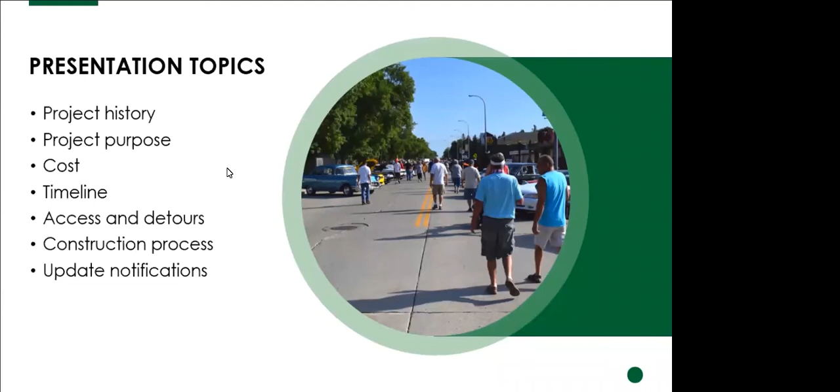And of course, at any time, please interrupt me if you have a question, or any of us as well.

So the history of the project: we really got going on this as part of our downtown efforts to revitalize some of the area. There was a lot of push from past commissions and the public to have our cultural core in our community be a place where we felt proud of a downtown that had businesses thriving, that had people wanting to come down there.

So we got to work on a lot of different projects. We had a downtown framework study that was done. We did some new zoning districts downtown. But as we kept looking at development projects, we heard from developers and engineers that one of the big issues was the street.

And so as we looked at the street, there was a lot of things that were good about it. It was moving traffic and all these things that you like for a commuter road, but it wasn't so good for downtown development. So we got to work on designing a potential project for that.

We worked with KLJ Engineering on a corridor study. They looked at traffic impacts, stopping, parking, all these sorts of different things that we typically would do on a larger scale project before we would get it done, and we let it sit for a little bit.

And then the governor came out with a new grant program, the urban grant program that was aimed at getting more development in core areas of town. It was part of the Main Street Initiative. We put together a grant application and applied for that, and we were the first awardee of that grant, and it really pushed us into actually getting this project done.

As we kept looking at it, it became apparent, after we did a core infrastructure study, that we would need to update the infrastructure in there, and that has added a little bit of scope to the project -- maybe a lot of scope to the project. But that's part of the process of starting to design a project; you find out there's more to it sometimes than meets the eye. So that's kind of where we are today and how we got to where we're going.

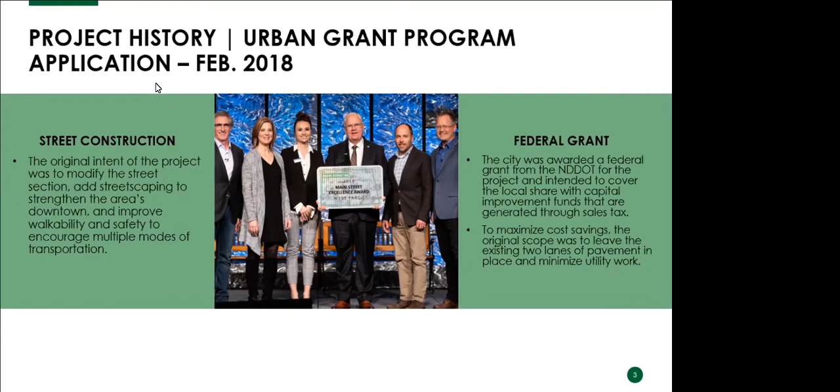Again, on the project history, we've been doing feedback for a long time, but most recently, the last input meeting was January 2019. We did have some more input meetings through the COVID times that were a little bit more difficult to handle. At that time, the estimated project cost was $3.6 million, and it's kind of gone up since then. So I'm going to let Dustin go into a little bit more of the project history and some of those meetings and where we got to where we are today.

Thank you, Tim. Hi, everyone. My name is Dustin Scott. I am the City Engineer. I will pick up where Tim left off and touch on the project history.

The public meeting we had back in September of '19 was our second public open house type meeting. We went through project details and project scope at that time.

As the project was in its early stages, we were really focused on the surface enhancements, transitioning the street into more of what you see out there with the Pioneer Place and Sheyenne Plaza developments that have occurred, where it accommodates the downtown redevelopment activities that have been going on.

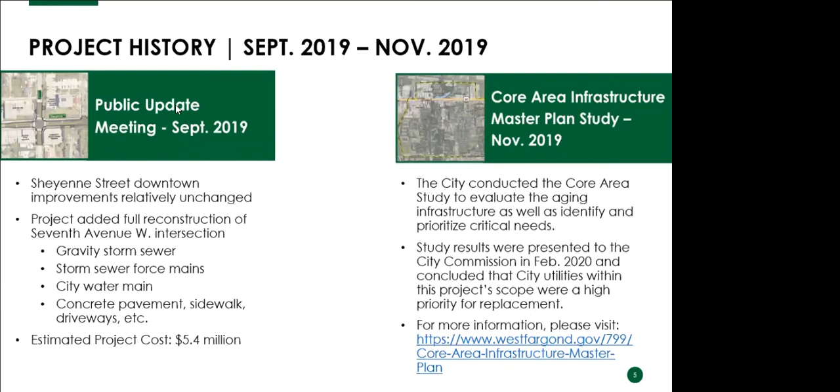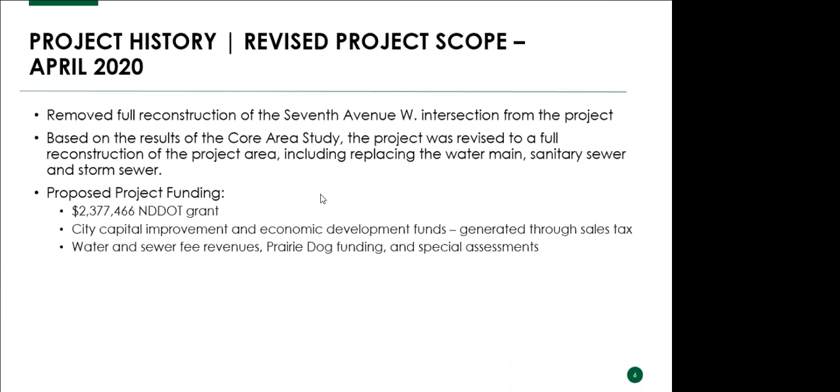Fast forward to April of last year. Unfortunately, during the pandemic, we had to conduct a virtual meeting, but that is where we shared with the public the intent to move forward with a full reconstruction project, basically just from the north side of the 7th Avenue intersection all the way up to Main. We did have the $2.3 million of federal grant from the DOT that we are still able to use, but the project cost significantly increased, as we'll get into in a couple slides here with our finance director.

So here are just some bullet points of prior public engagement. We had our meeting in April of 2020. Soon after, we then started taking the project to the City Commission for formal actions, where the district was created in June. An engineer's report was reviewed in June as well, and amended or updated in August of 2020.

At that point, our final plans and specifications were sent to the DOT, where they advertised the construction bids and opened up the bid letting in the middle of November. First meeting in December of last year is where the City Commission reviewed the results of those bids and awarded a contract to Dakota Underground.

We did have another meeting in the middle of December with our Special Assessment Commission to start reviewing options on how we could look at allocating the assessments over this district. This is a unique, complicated project, so we felt that bringing the Special Assessment Commissioners in early, which typically we engage them once the project is done, was beneficial. In this case, we wanted to get their thoughts early on. They didn't make any formal actions, but we were able to put their comments into what we consider now our pending assessments for this project.

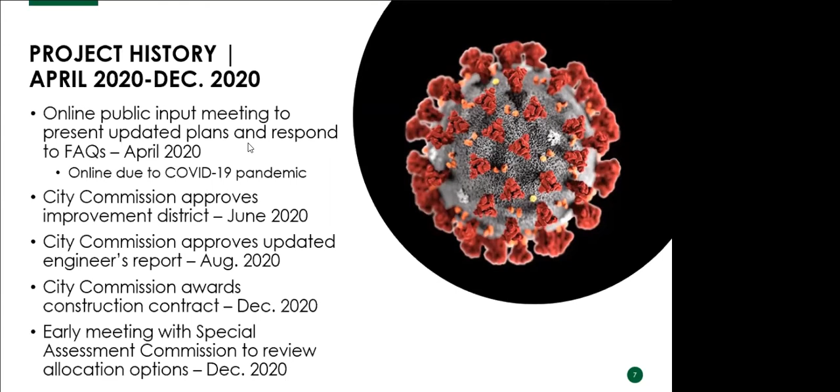The pending assessments have been published online and are available if you go to the city's tax information website. So with that, I'm going to turn it back over to Tim on the purpose of the project.

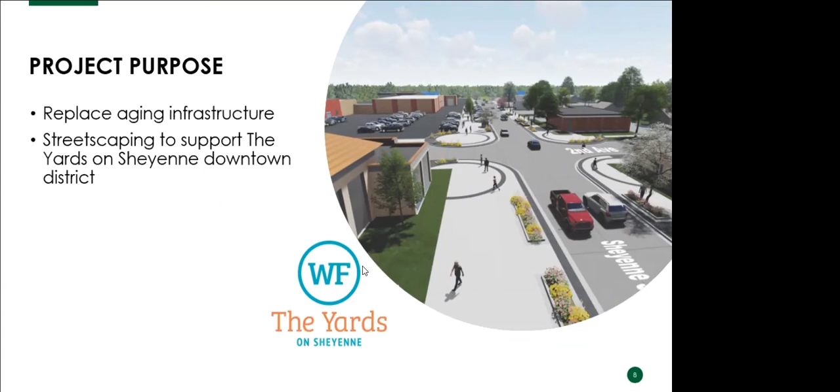Again, two very specific project purposes now. We went from one, which was really the streetscaping and aesthetic appeal of downtown, to supporting our downtown economic impacts, to now adding this replacing aging infrastructure. In our opinion, and what we've presented to the Commission, the infrastructure is aging, it has problems. We have a study that proved that to us. So our biggest concern was that we do this project and then have to come back in a few years, rip it up again, and go through updating the aging infrastructure. So it became a two-pronged purpose for this project.

Progress of downtown, I think it's becoming pretty clear that there is investment interest. What I look at this project as being is potentially a catalyst for more incremental growth. We've had a couple of really big projects and now a third. I believe that other smaller investors, when they see a road finished to this magnitude, they're going to have a lot more confidence in developing downtown. We've had these great projects, Sheyenne Plaza, Pioneer Place, really changed how that area looked. Adding this parking is going to provide a lot better atmosphere down there and less parking issues, having on-street parking available. We do have a lot of work to do, and certainly it's nice to see some investment to push toward that.

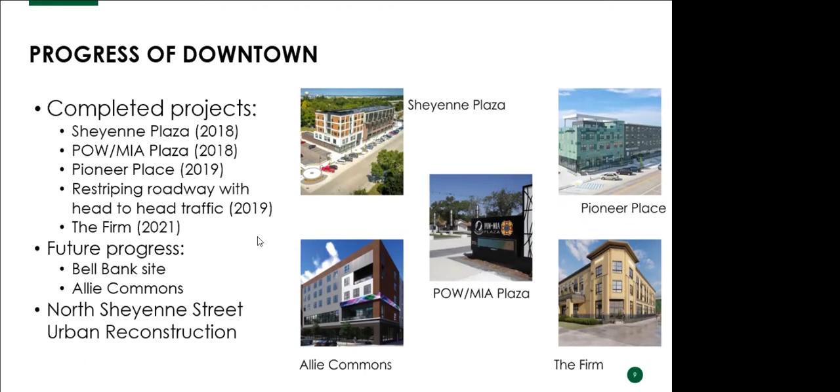With that, I'm going to turn it back over to Dustin again.

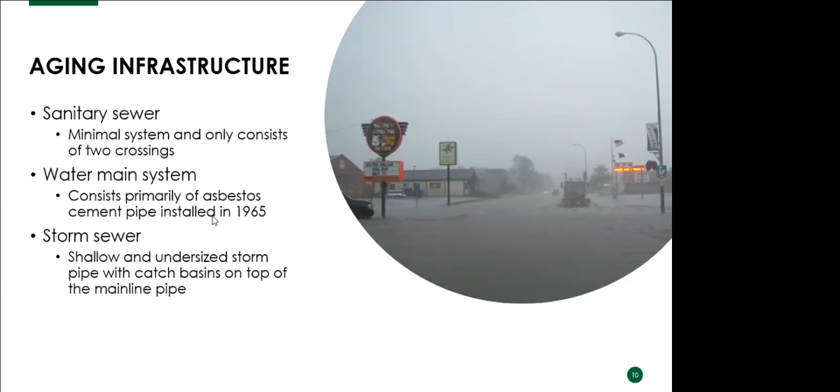These next two slides, it's difficult to see all the detail, but we wanted to provide an updated exhibit of what this project is doing. This slide shows where we are replacing the underground utilities. Blue is the water main, orange is storm sewer, and green is sanitary sewer.

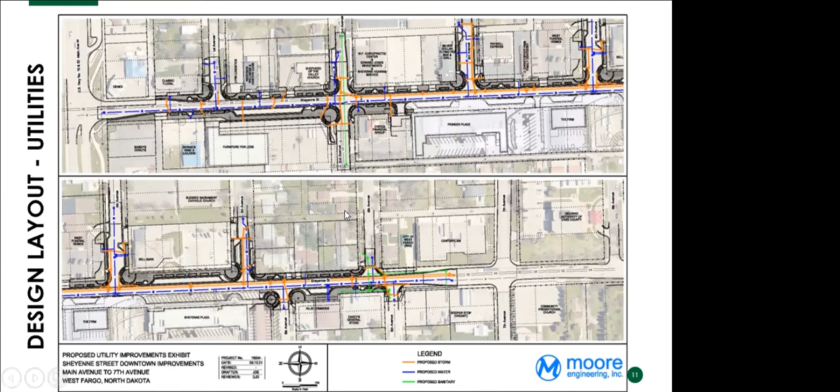This next slide is basically our layout of what the street is going to look like when we're all done. The dark shaded areas are where we're making these improvements. So you can see we're not just focused on Sheyenne Street itself—there is some work being done on the side streets up and down the corridor here.

This information is going to be available online, and if somebody wants copies, they can contact the engineering department. We will certainly work within your needs to get you this information.

So with that, I'm going to transition over to our Economic Development Director, Lauren Orchard.

Thank you, Dustin. As both Dustin and Tim have mentioned, a huge portion of this project from the beginning was meant to help enhance our downtown, now known as the Yards, for our businesses, but also for our residents, to provide new amenities to that area.

We really do believe the things we add to this streetscape are important for business development as we go forward. Just seeing the picture Dustin shared, we've had businesses down there since these big new investments occurred that were really suffering from the current infrastructure. We've been in constant communication with those businesses about what this streetscape is going to look like and the benefits that will be seen underground as well.

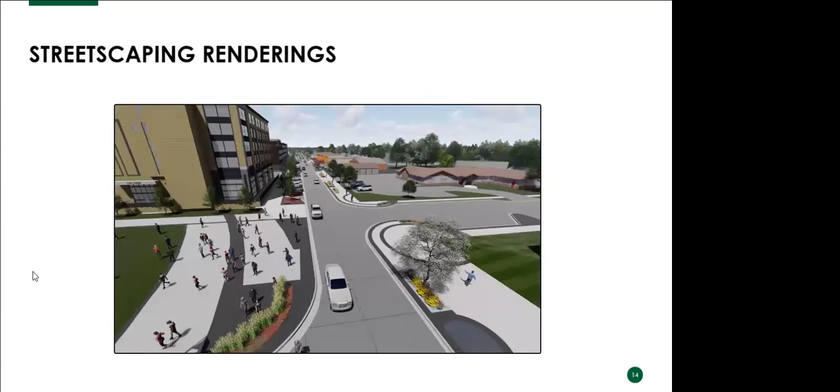You'll see throughout this video these bump out locations, where we're going to see hopefully some future public art and permanent art fixtures, gaining advice from our local businesses on what that should look like. We'll also see some street furniture to help increase the amenities in our downtown.

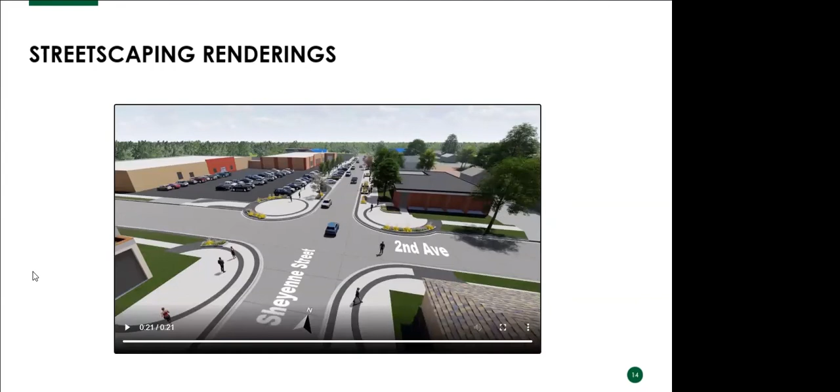Here are some other things to note that we'll be adding to truly make this feel like a downtown and make it a significant location in West Fargo. As I said, all these amenities we bring are not only for our businesses or for the foot traffic that feeds those businesses—they're for our residents, for enjoying the public spaces we've created, really helping people feel like they're at home in West Fargo.

With that, I'll turn it over to Jim.

Thank you, Lauren. My name is Jim Larson. I'm Finance Director for the City of West Fargo. I'd like to talk about the funding of this project.

As Dustin already pointed out, this project has continued to evolve as additional research and analysis has been completed. It started at $3.6 million, and it's at $10.45 million today. But there's basis for that change in scope and the improvements that will be made. Some of it is related to adding things like water and sewer, adding the economic development components, and also there's price creeps that happen as you bid. That's what these numbers address.

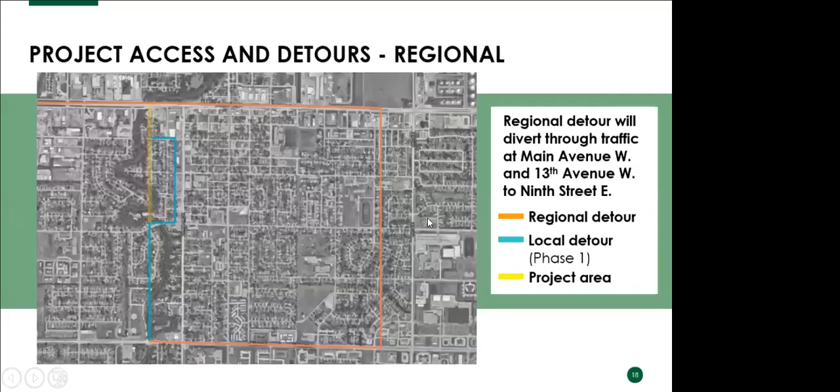So the question is about the timeline for phase 2. On this slide, it's showing mid-July to mid-September, and I believe the previous slide showed the same thing. But the text here says the phase is expected to last through the end of August. We know we're going to get into September, we know we're probably going to be working through the end of August. It's possible we could end the first part of September, but as far as the content we have available right now, I believe the project contract is set up through mid-September.

Okay, I just wanted to make sure I understood. And then my second question, forgive me if this has already been discussed and I missed it, but what are the plans for 2021 cruise nights then, with the construction, and where are we at with those?

I will defer that question. The question that was just asked is, what is the plan for the 2021 cruise night events that we usually have downtown? So my understanding for 2021 Cruise Night is that it will be hosted at the Lights, and that is being run by West Fargo Events, and Toppers was heavily involved in that as well. If you have more questions about the details, I can get you that behind the scenes - I just don't want to get it wrong up here.

Well, is it planned to return after this construction? Because I think a lot of residents have questions about cruise night. The answer is yes, absolutely, and in our design we were also very conscious of what cruise night would look like after the road diet is done, so it's in the design.

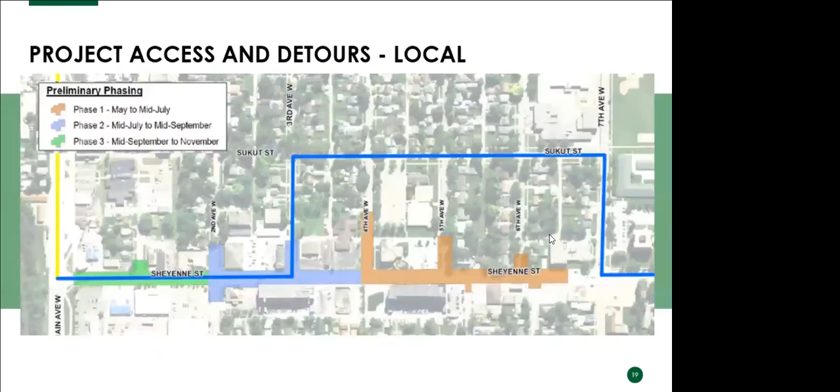I was just gonna make a quick comment that the streetscape looks really cool, and I'm really excited for the things that we'll be able to put there, like public art and different furniture pieces and stuff like that. I think that'll be a really nice addition to the downtown area, and it'll really help, like Lauren was saying, complement the different downtown events that we have, like the street fair and cruise night. I think they'll be really great.

So my question then is, is there a timeline for these things to get put in place, or are these kind of planned later? Lauren, do you want to? Sure.

The question for those that maybe didn't hear it is the streetscaping components, part of what you see on the screen, are they planned for now or later? That sum it up? Yep. Thanks for that question, Nicole.

So the actual pavement and all that, of course, will be done as part of the project. Actually, some of the underground work that I didn't mention earlier, that's really neat and will help businesses too, is we've included fiber optic cables as well underground. So if we do have businesses in the future that need high-speed internet, that will be available, and also to help feed things like kiosks. It gives our IT department a whole lot more flexibility, and it helps give us flexibility with the things we can come up with for our downtown businesses and other organizations about what can go in those creative spaces. So with this project, just getting it done this summer is laying the groundwork for us to come up with what are the things we can add next year, probably.

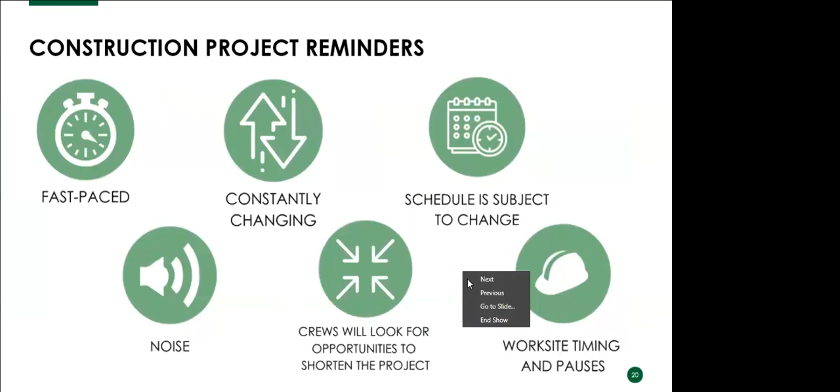Could you share that with our gathering here? You had it there, right there, back one, right there. The bump outs that go to the east, the construction there, would you share with the public what the purpose of going down those streets is? Is that water, sewer, all those types of things, or the surface road condition? Please share why we're going back into those neighborhoods.

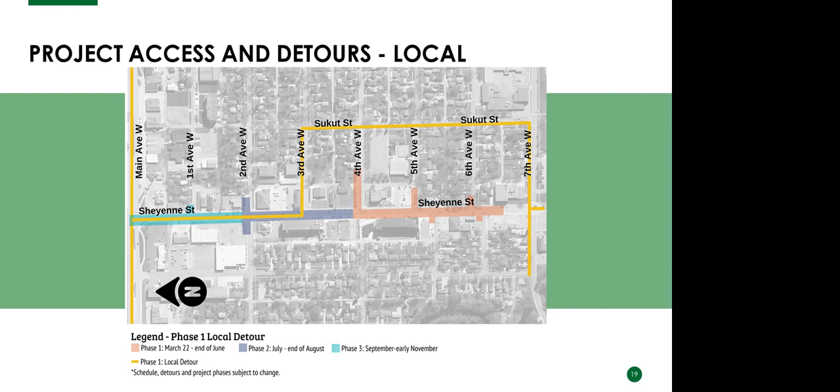Okay, great question. So for those that didn't hear, the question is, why are we doing some of the work on the side streets that we've shown? Yes, there's a combination of the utility tie-in. So for example, if we're replacing a water main or a sewer pipe to get to a logical connection point, that's part of the reason there.

The other part is it's also an opportunity to add some parking. For example, as you can see on this particular map, this is Third, and we are able to get some additional parking here on Third. There's additional parking shown here on Fourth. On the south side of the road it's diagonal, on the north side it's parallel. So again, a combination of facilitating additional parking and making utility connections.

The other objective is, we know these other areas will have to get reconstructed at some point. When they do, we're trying to set it up so they don't have to close down Sheyenne Street. For example, in the future when we have to replace 2nd Avenue, we won't have to close down Sheyenne Street to make those repairs. We've set ourselves far enough apart now that we can do that without impeding the flow on Sheyenne Street. So again, multitude of reasons, but those are the three primary.

The most important part of that conversation is I wanted the public to know about additional parking. We are concerned about overflow parking during big events in Morrison Street and those other great neighborhoods, and this will help facilitate that to some degree.